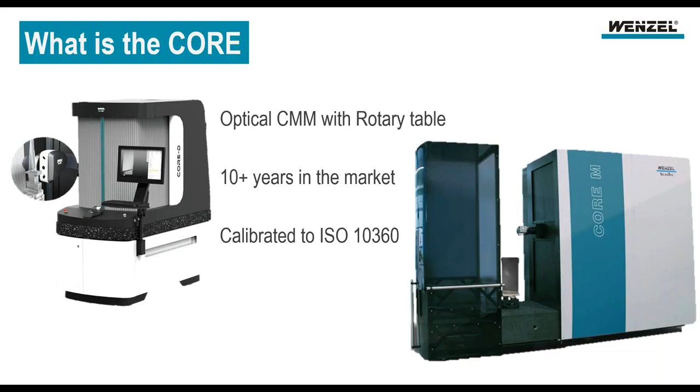So I touched on that a little bit. It is an optical CMM. Well, how does that work? What the core is doing, it's combining 2 technologies together to give us kind of the best trade-off between both worlds. You know as well as I do that some optical systems can measure down to nanometer resolution, but typically the optic will have to be incredibly close to the surface of the part, within a millimeter or 2.

With the core system, we're using triangulation, which is 2 cameras and a dot of white light to give us a fairly large standoff distance. So the sensor can be up to 80 millimeters away from the part. And we're combining that with peak intensity measurements to give us the absolute center of that dot. So that's where we get the accuracy of plus or minus 4 microns.

Being far away from the part is important because this machine is incredibly fast. And to move the part fast, you need to be away from it to minimize the risk of collisions. It needs to be accurate, that's where the peak intensity comes in. So if we go to the upper right of this slide, I've got 3 bell curves drawn out. So how does this peak intensity work?

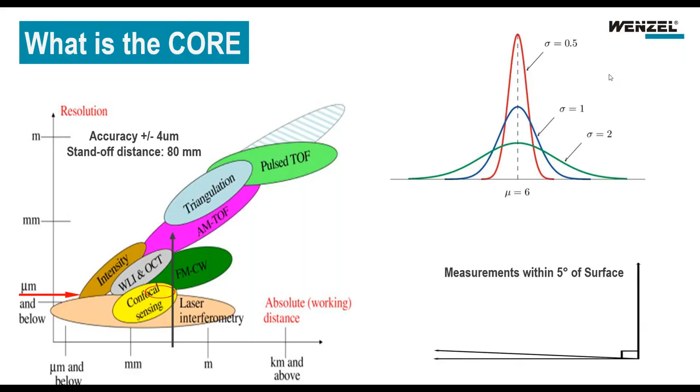So if you look at the red one, that's typical of the sensor being maybe perpendicular to the part. Go down to the blue line, maybe that's 45 degrees off perpendicular, and the green line anywhere from 5 to 25 degrees off of perpendicular or off of the surface. So you can see that the curve itself gets stretched out, but the optics and the sensors inside are only looking for that peak value. So regardless of 5 degrees off the surface or perpendicular to the surface, we're still getting very, very accurate measurements within that plus or minus 4 micron envelope.

So those 2 technologies that I've talked about, what does that get you? So I put a myriad of parts up here. Like I said, if you go to the upper left here, all of these low pressure, large blades can be measured on the Core M, all the way down to the very, very small high pressure blades measured on the Core D.

With the peak intensity being so small, looking really at the center of that dot, we can measure knife-like edges. So down here in the bottom, these low pressure blades, the trailing edge of these is incredibly sharp, almost enough to cut you. And the system has no problem with that. And Henri will touch on that a little bit later.

Also, like I mentioned, it's a CMM. So there are blade-specific measurement tools out there. They may only be able to measure blades or blade features. This machine not only can measure the blades, it can measure prismatic features. So if we put this little red circle up here on the upper right, you have these fir trees, these dimensions here, or these sealing edges, all of that can be measured with the same system. You just put it in front of the sensor and measure it like you would dragging a probe, any type of probe.

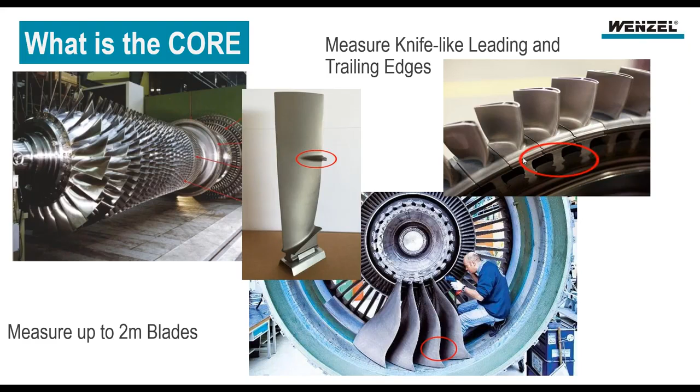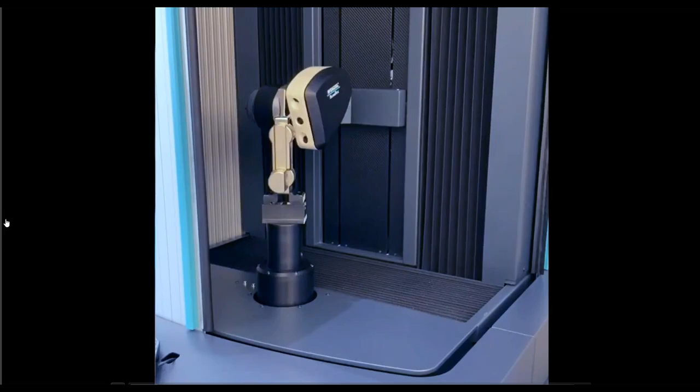So now that you've got a bit of an idea of how it works, let's take a look at the core in action. So I've got a small video here. This would be the operator's perspective. And you can see it has a door open on the right and closed on the left. It is shop hardened. The doors are automatic. They can be automated to put this in an automation cell. But this is what the operator is going to see. Unfortunately, it doesn't really do the system justice because we can't see what the camera is looking at.

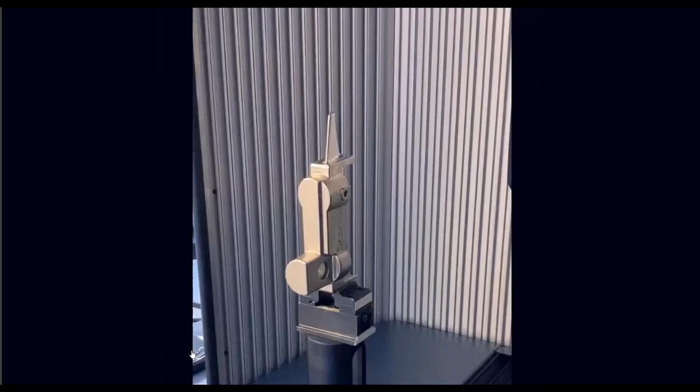So with that in mind, here's a view from the optics perspective. This is inside the machine. This is what the machine's seeing, and this will give you a better idea of that dot of white light I'm talking about, because it's kind of abstract. And remember, you can see the dot on the surface, and it looks a little big, but the machine is looking for the absolute center. It's getting that true surface data. So as this video plays, Henri, you wrote the program for this. We're going to look at the program a little later in the software. Why don't you give us a rundown of what the machine's actually doing as it goes through this?

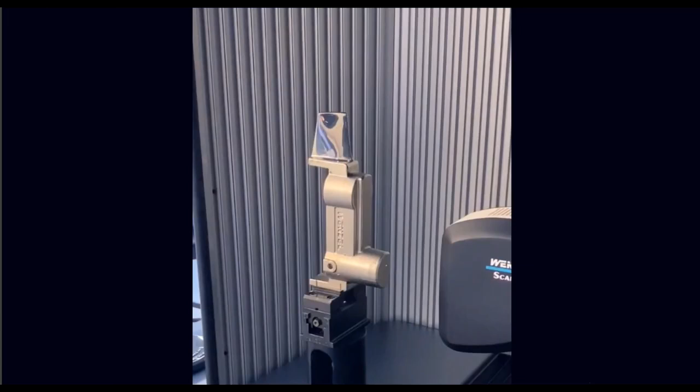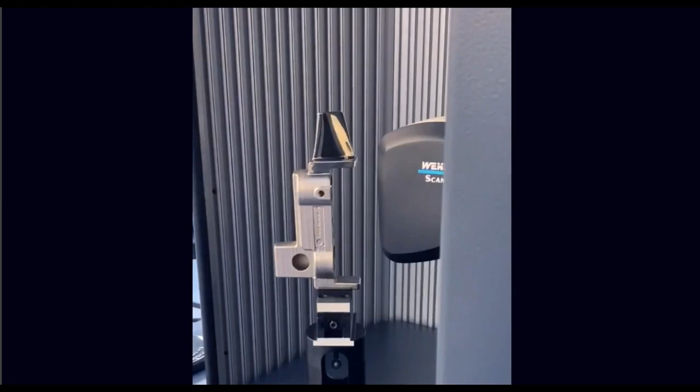So obviously for any part measurement, a datum structure is required. So what it does is it's measuring a datum A, a datum B, and a datum C feature here. So it's scanning this plane and makes that datum A. And then it measures the two diameters, the two large bores, and it basically uses those two to create a datum B feature, which is basically a rotation. And then one of the two is an origin.

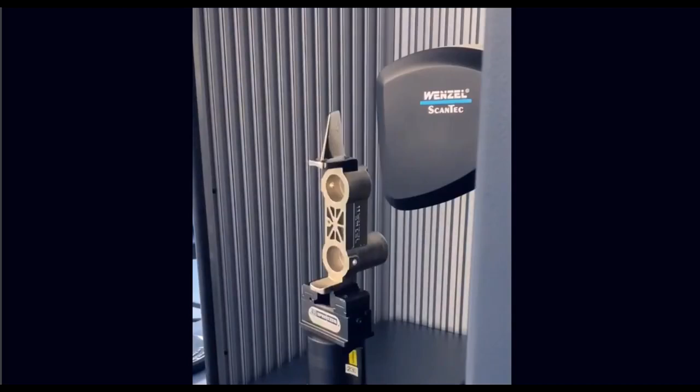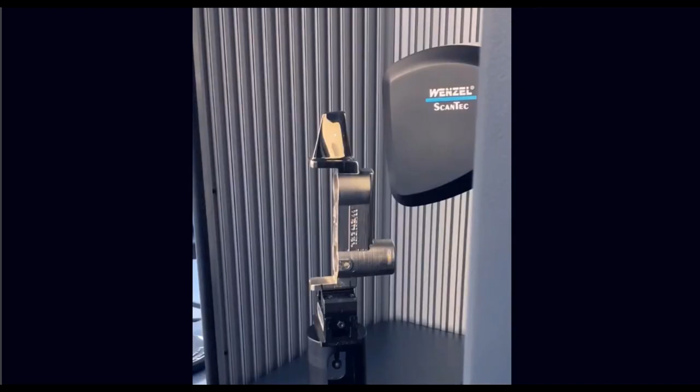And then it goes in and is now actually scanning one of the sections, the bottom section. And before it starts to scan, it actually establishes the exact location of the actual part. One of the biggest problems in metrology of blades is that leading and trailing edges that get very sharp cause overlapping areas when measured with a regular ruby kind of stylus. But in this case, it actually establishes the location of the actual section. And because we are measuring surface data, we're not compensating anything because the probe radius is 0. We're measuring exactly on the surface and never end up with any overlapping areas on leading and trailing edges.

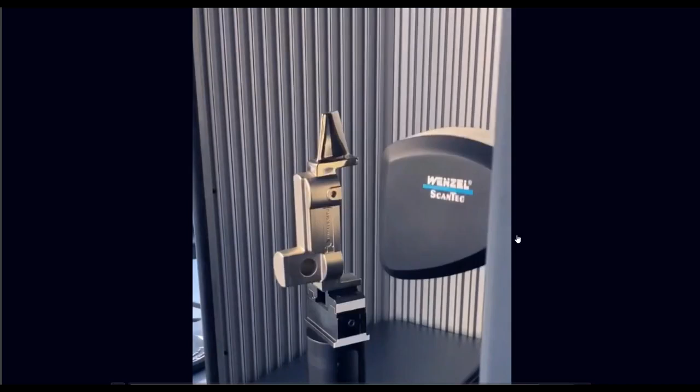Go ahead, sorry, Henri. It's actually also measuring a couple of diameters, those small little diameters, just to show the possibilities of mixing prismatic data with airfoil-specific data. Sure.

So when you were talking about finding the actual position of those sections, on this blade, it's not very twisted or funny shaped, but I assume that's very important when we get into some complex blade geometries to make sure we follow the actual profile and not just a straight path across the blade. Is that true? That is true, yes. So it is important to make sure that we're measuring where the actual sections are versus where the nominal definitions are. So we go in and sample the part before we actually start to scan to establish a local alignment. This is a built-in function on the controller of this machine.

So you're not actually doing the programming for that, it's doing it automatically. That is correct. As soon as in the program you basically tell it, I want you to measure in blade mode, it will automatically use this algorithm to do that. Okay, so we're going to see that in a little bit.

So this is where I want to transition actually to you, Henri. I want to talk to the customers about why the core system is their solution. And I think you touched on it a bit, where we're finding the absolute location of the section. We're also finding that edge. So I think you have an example brought up already on your PC of what that means to measure those sharp edges. So Drew, if you could just transfer us over to Henri's PC, and we'll take a look at the software. Those look like sections.

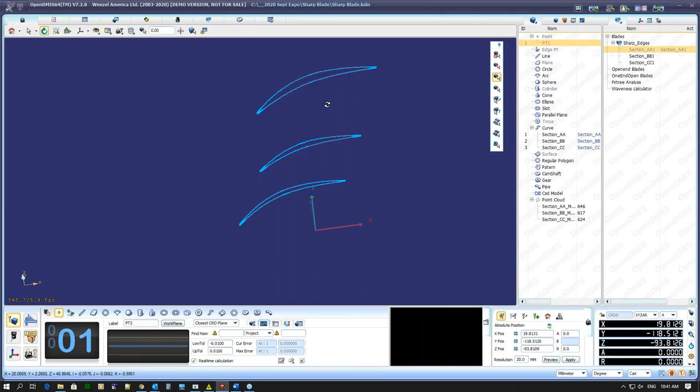Yeah, so this is a typical example of a blade with very sharp leading and trailing edges, and the system is automatically adjusting for the density of the points, and that's what I really wanted to illustrate here. So I'm just going to zoom in a little bit on one of these sections. And what you'll see is that, as a programmer, you basically tell it what the maximum distance is allowed to be between individual points.

And because there's a very small amount of curvature on the concave and convex sides of this blade, the distance between the points automatically goes up to the maximum allowed distance on the concave and convex sides of this section. But as you can see here, this is a typical leading edge example. The density of the points is automatically increased on the leading and trailing edges.

And again, this is a function of the controller. So the control actually knows, based on the scan path, the definition of how we want to scan this section. It knows where the curvature of the section becomes very tight. And on a leading and trailing edge, obviously that is the case. So it automatically increases density along this leading edge.

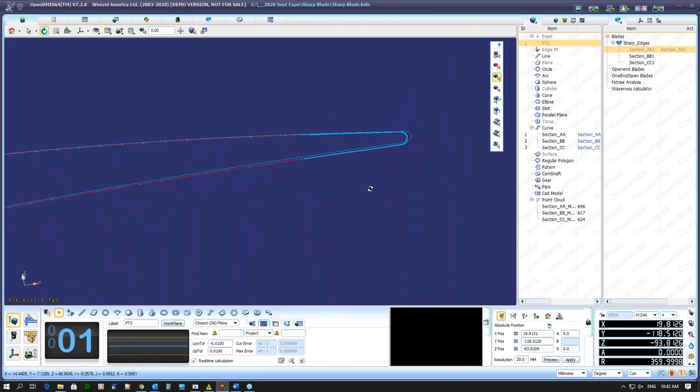And then notice that it goes back to the maximum allowed distance on the concave and convex sides. And so that's on the leading edge. And the same thing exactly happens on the trailing edge as I go to this side. Now I can assume that obviously we want more data around the smaller radii, but tell me a little bit more about why that's important to have that automatic feature in there.

So one of the important things on a blade is that the leading and trailing edges want to be as round, as circular as possible to reduce the amount of turbulence generated around the leading and trailing edges based on imperfections. And so what you can see here is that in the manufacturing process, it's rather hard to get this nice and exactly round. And so you'll always see some imperfections on leading and trailing edges.

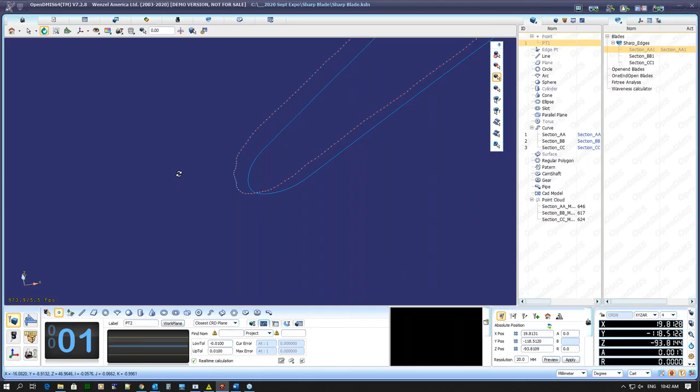And the great thing about the core is that it doesn't filter this away. It actually shows you what the shape of that leading and trailing edge is because of the zero probe radius. Can you explain that a little bit more for me with the zero probe radius? I don't think I do a good enough job explaining it. It's looking at the center of that dot, but how does that compare to a probe?

So imagine having a stylus, a typical Ruby stylus that is used for most measurements on conventional CMMs. If you imagine a Ruby ball of a millimeter, this is about a 3 thousandths radius here. So imagine a Ruby ball of 1 millimeter, 40 thousandths. As it rolls around this leading edge, it cannot capture the little details that you see here, these divots and spikes, and it smooths it as it goes around it. And as a result, you're not getting the actual surface data. You're getting mechanically, if you want to call it that, physically filtered data.

So you could be manufacturing blades that you thought were very smooth and efficient that actually have these little imperfections. So you think about that over maybe hundreds or thousands of little blades inside of a turbine. Those little inefficiencies all add up. Absolutely, and it definitely has a negative effect on the efficiency of the engine, performance-wise as well as fuel consumption-wise. Yeah.

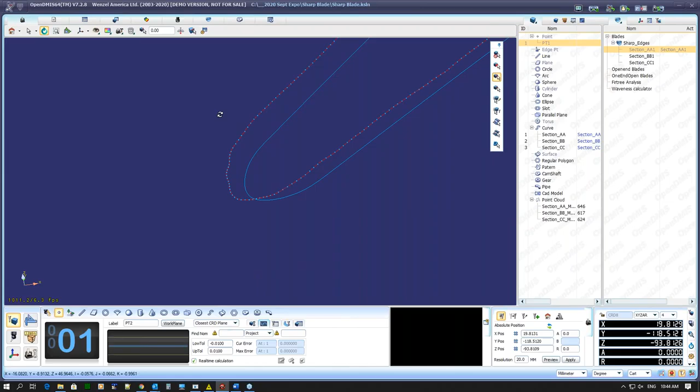So you've showed us these little sharp edges. I'd like to kind of circle back. The video we showed is of a program running. I was wondering if you could bring that program up now that we know about the point density, because our example part isn't really blade-like. It's kind of round, and maybe show them this program running from your view in the software.

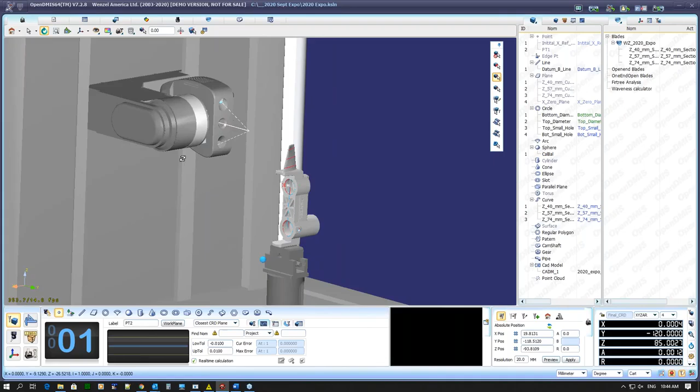So just to show you real quick here, here's the machine. I'm physically connected to the machine. And so what I'm going to do is actually run the program that you saw in that video. So we'll just start and run it.

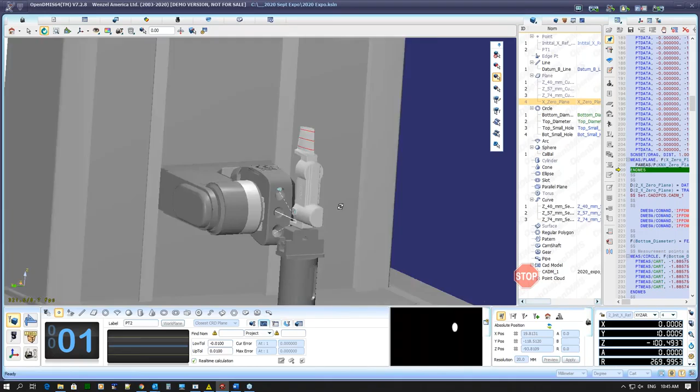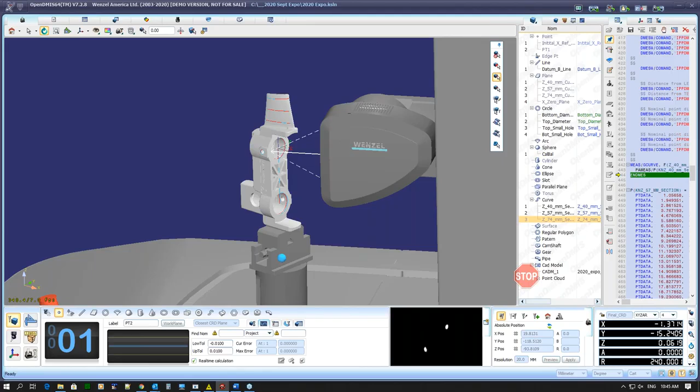So it does again, exactly the same. Yeah, talk us through this again. So right now it's scanning that datum A and creates a primary datum. I don't know if you saw there was a slight shift on the CAD model, meaning that the physical part is slightly angled on the machine. And so it creates a primary datum on that face. And then it does the two diameters, the bottom and the top, and creates a secondary datum. And then the top diameter in this case is the actual origin feature.

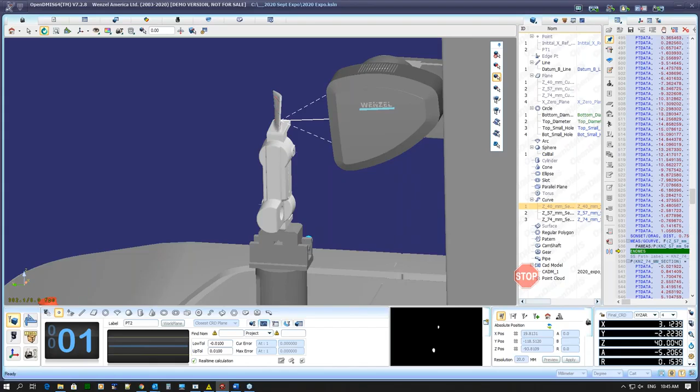And here it goes and does a scan, the bottom section first. And as you can see, the bottom of the screen, you can actually see what the camera is seeing. So the camera looks at the projection of the light on the surface, and the top and bottom camera are basically picking up on this projection of that light.

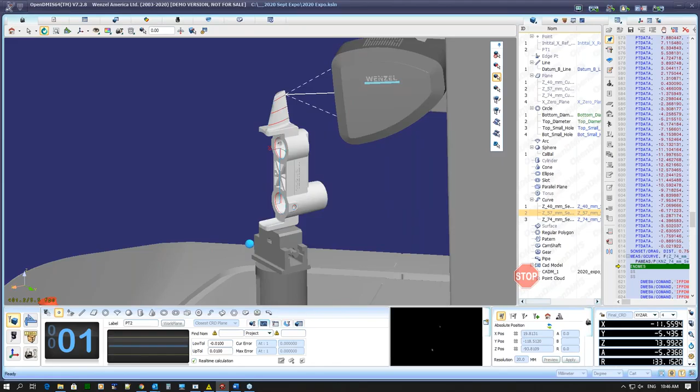It brings up a question, Henry. It has two cameras. What if you were trying to get the cylinders or the plane down there, and one of the cameras was blocked by a part of the part? Can it still measure? Well, there's a calibration routine that takes about 2 minutes, 3 minutes that calibrates the head, and basically any angle of the head is at that point calibrated, as well as the individual cameras. And so in that case, it doesn't matter whether one is blocked or not; it still does a correct measurement.

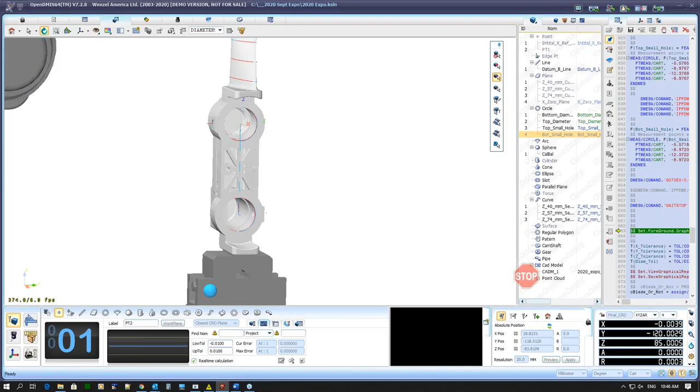Maybe touch on this a little bit later, but I did notice you're doing the blade sections and the prismatic features all together, so that's interesting too. And as you can see, it's a single program that basically includes the prismatic features as well as the blade-specific features. And so, in a typical CMM report, you can combine the prismatic as well as the blade-specific dimensions in a single report.

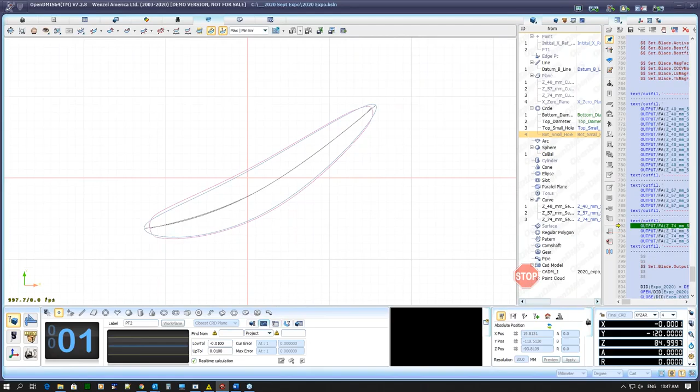So Henry, now that you've showed us how it can adjust the point density and how it can gather this data, I'd like to touch on, okay, what do we do with that data? How do we evaluate it? So we have a blade-specific module built into the software, and it basically takes that nominal and actual information and, based on customer specification, it performs a best fit and then does a profile analysis, as well as thickness evaluations. Very commonly on blade sections, leading edge thickness, trailing edge thickness, maximum thickness, chord length. These are all dimensions that are quite critical for the performance of that specific part that gets mounted in this engine.

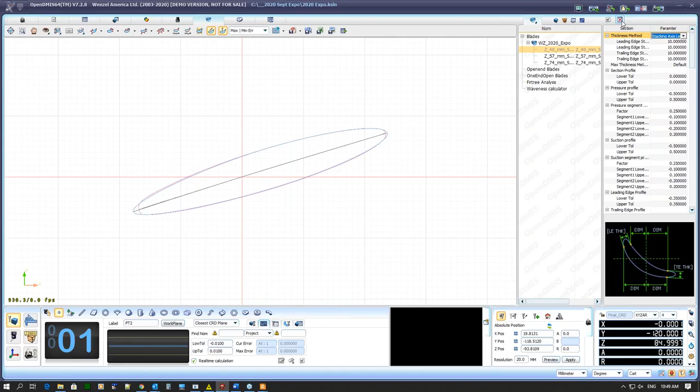So if I was a supplier to a big turbine manufacturing company and they were requesting that I evaluate my data in a certain way, you're saying that we probably have worked with them and we have it, and if we haven't, then we could implement that? That is absolutely correct. Many of these specific dimensions have been done in that way. To give you an example, if I just look at this section here, and like you said, this is not really a good example of an actual blade, but we have things like wrap angle. This is one way of looking at a characteristic that's very specific to a manufacturer. The BE distance, which we call the camber depth, is a dimension, again, very specific to one manufacturer.

We also have, as you can see here, we performed a least squares best fit in this case, but we also have different ways of performing other best fits. A very uncommon one that we actually implemented not too long ago for one of our customers is the circumscribed and inscribed best fit, which is very similar to a guillotine gauge type of analysis, where, imagine a hard gauge,

and you put a blade inside the gauge, and you close two knives, and these two knives are in the nominal shape of the blade, and they will come and touch the blade on concave and convex sides. And of course, they are linearly hitting the blade, so they will hit at the highest point of the blade, which means there's going to be a gap in the non-highest points between the knives of the guillotine gauge and the part itself.

Yeah. And so that's what this circumscribed best fit does. It actually simulates a guillotine gauge for the best fit methodology, not for the measurement. Interesting. And that, again, was not in the software. A customer needed it, and so we implemented it. That is correct, yes. Neat.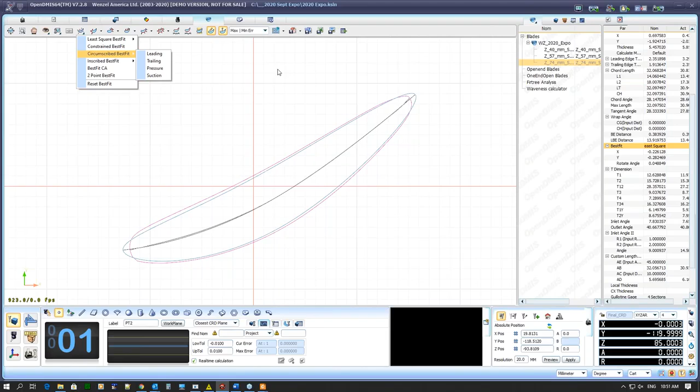So now that we've evaluated this, and it's interesting because basically everything we've said so far is based on customer feedback. So we can evaluate this data that we've collected based on their requirements. So what do we do to tell them about it? How do we report that out? So I don't know if you noticed, but when the program was done, it actually generated a report.

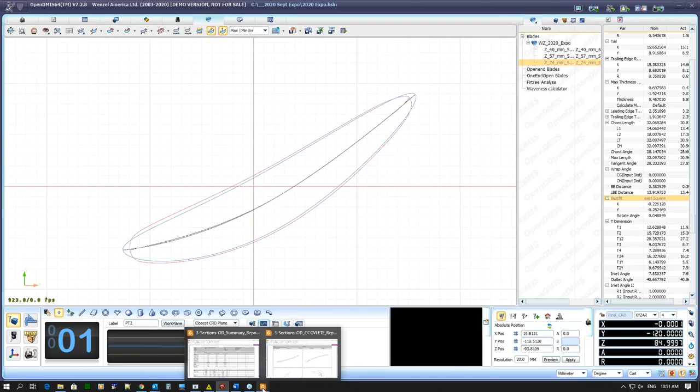And so what we've done in this program is we've actually created a numerical report, and I'm just going to scroll up here, that actually shows you the bottom diameter that it measures for the datum, then the top diameter that it measures for the datum. And then if I scroll down here, notice that here are some blade-specific dimensions. Here's the leading edge radius, trailing edge radius, etc. for section AA. And it basically gives you a numerical representation of that specific section and its leading edge information.

Now, in addition to that, it's also generated a very specific blade report. So in a lot of cases, and I'm not saying everyone, the customers are interested in just numerical data. But once they see something that's out of tolerance, they may want to go and look at the actual form error reports or the graphical reports to find out, what happened with that? Why is that section out of tolerance?

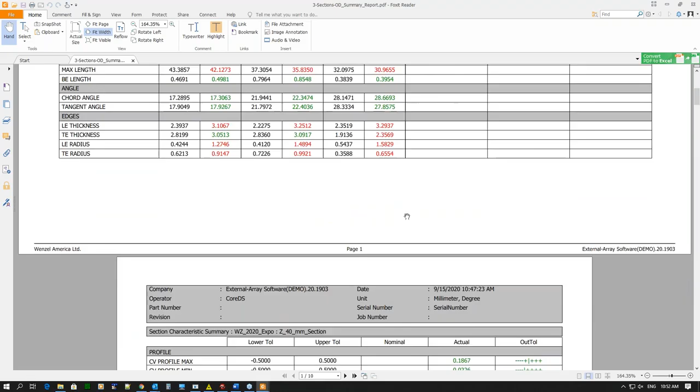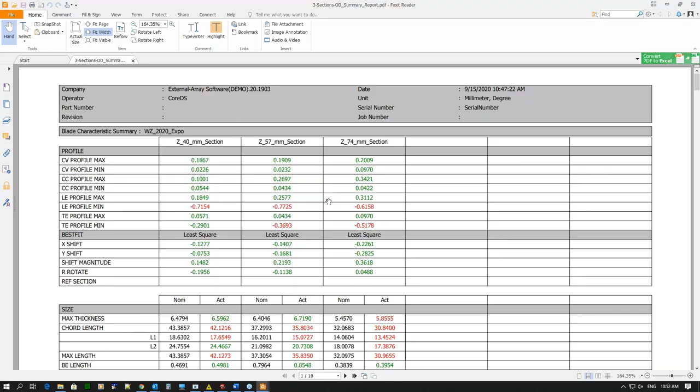And so as you scroll down in this report, this is what we call a blade summary report. So if you start from the top, the first page shows the three sections. Of course, if you have more sections, then it will show more sections. And it just shows a quick overview of what the dimensions look like for that specific section. And as you scroll down, it drills down into the individual specific section.

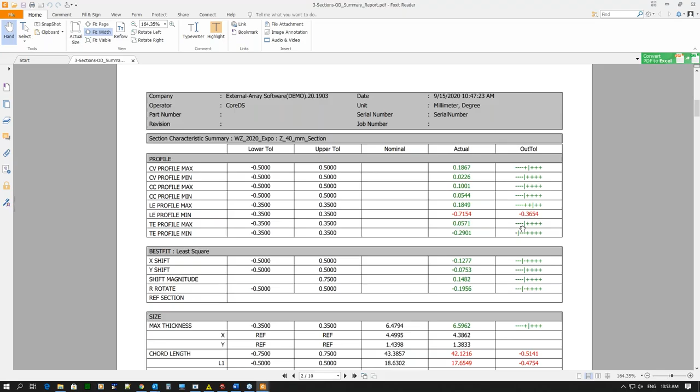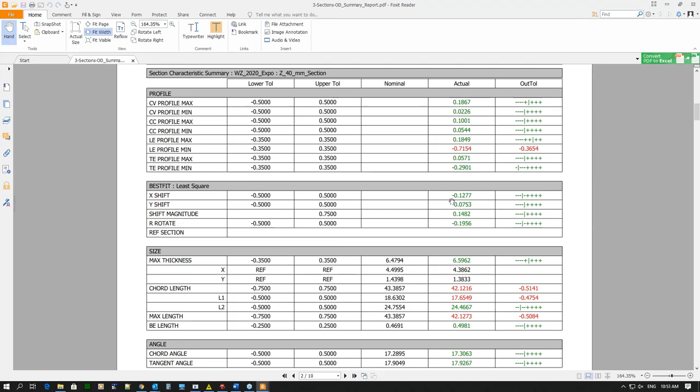So here we got section at Z 40 millimeters in this case, and it shows you all the detailed information, the profiles, etc. It shows you what the tolerances are, and then it shows you whether you're in or out of tolerance and by how much. It shows the best fit results. It says, okay, we did a best fit for this section, and these are the results of the best fit. We're out by this much or we're in by this much. Obviously, in this case, we're in tolerance.

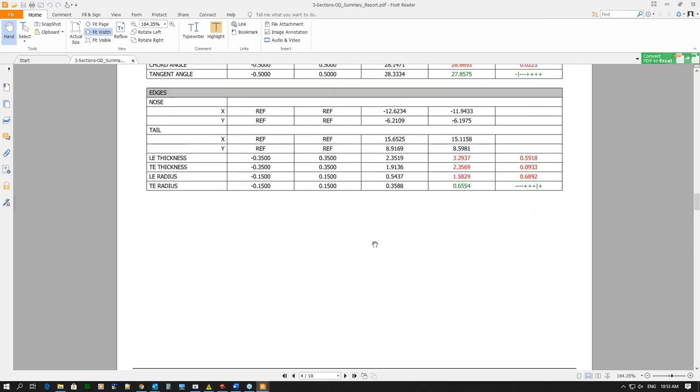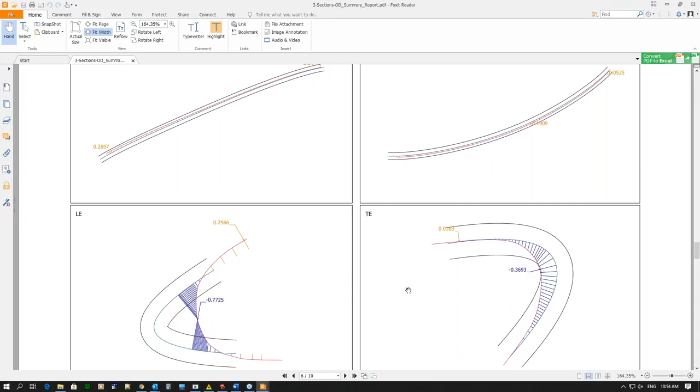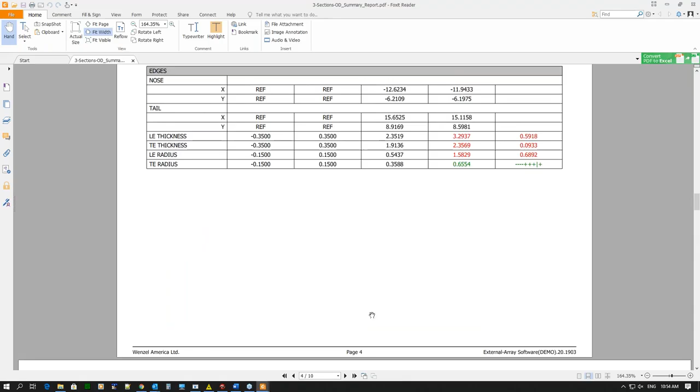So this is one report. But in a lot of cases, customers may have specific report requirements. So we have templates. And these templates give you the ability to, this is the summary, excuse me, let me go back to this one here. So sometimes all that information is not necessary. If they already have a numerical representation in the numerical report, maybe they just want to see profile in the report.

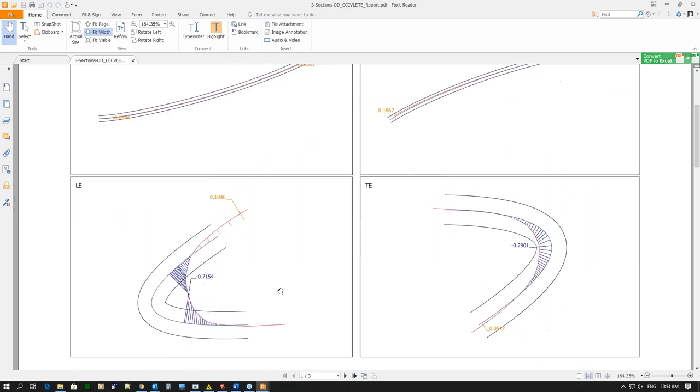So in this case, we created a template for this specific customer that shows just the profile report because they already have all the numbers. And so again, you can see here, this report just has the concave and convex sides, the leading and trailing edge for each section, reducing, of course, the number of pages and giving a very quick review of what might be happening with that specific section. So this is following along with that same philosophy that we did with the evaluation methods.

If a customer needs a report to look a certain way, we have the templates in there, but what if they're not in there? What if it's something strange that we don't have a template for? So we have a template builder. It basically allows you to take any existing template and modify it to your needs. In many cases, actually, we do that for the customer because we obviously know the product very well, and we know exactly how to create or edit templates. And it's a very quick process.

It's just a matter of editing an existing template or creating your own. So it's a nice feature. You can have us adjust that to what you need, and then once it's done, for the most part, the customer can just hit the button to report, and it's going to look exactly like they need it for the rest of their parts.

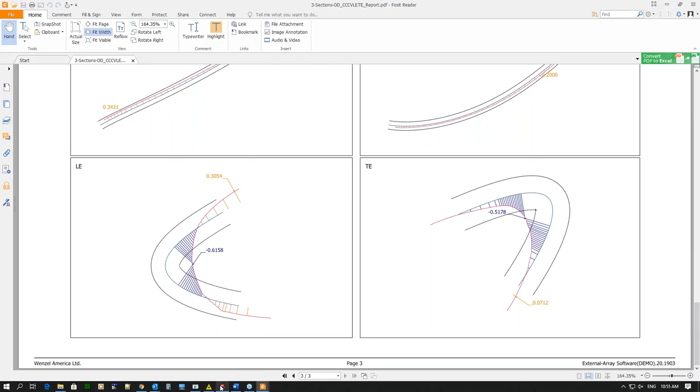Exactly. So yeah, I want to come back just a little bit. We're about 5 minutes out here. You showed us a blade report, and you kind of had a regular CMM report, and it is a CMM, but maybe we can go a little bit into programming the full part instead of just the blade.

So this is the program. This program right here is basically the measurement of the datum features, as I said, datum A, and then the two diameters for datum B and C. And then in the same program, we scan the sections. So if I scroll down a little bit more, right here we're basically creating scan paths and scanning the sections, and then down below that we actually do the analysis, so the actual evaluation of all the blade-specific dimensions.

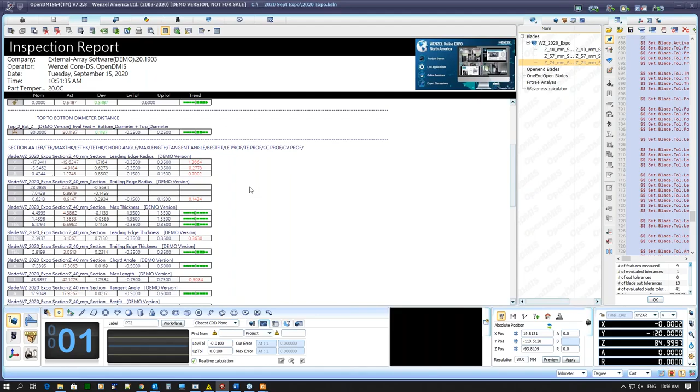So forgive me, Henry, I know I'm just a sales guy, but that looks like an awful lot of code, and I see some buttons down there at the bottom. So if I'm measuring a blade and I also have, like you said, that plane and those circles that you measured, can I just use it like I'm on a CMM and just click the button and say I need to measure a circle?

Absolutely. So you basically go in and use the tools available right here from this toolbar to pick and choose whether you want to do a two-dimensional feature like a circle or a line, or a three-dimensional feature like a cylinder or a surface. And you just tell it that you want to scan it in a certain methodology, and that gets created into the program.

And do I have to wait until the very end of the program? Can I just put it in wherever I need to? Yes, from an editing or program creation standpoint, I can put my cursor anywhere, start recording right in that position, and tell it what I want to measure. So I can always go back and edit the program. I also have a regular editor where I can edit the program like a text editor. So you can go the easy way like I like, or the very detailed route like you like. Yeah, that's well said.

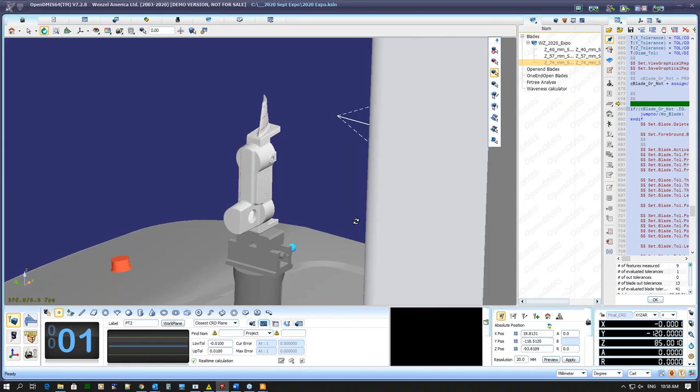So Henry, I really appreciate you hanging with me on this presentation today. Is there anything else you'd like to say about the software or the machine? Well, what I can say is that our customers that have the core system are very satisfied. It's a very robust system. It's shop hardened. It's very reliable, and I'm just very happy to deal with the customers that have it and are very satisfied with it.